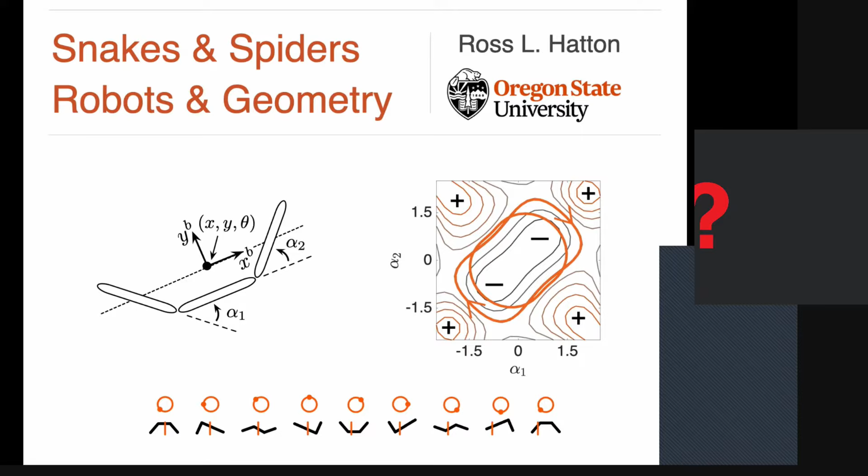My background: I came here, was an undergrad at MIT in mechanical engineering working on mechanism design and precision design. I spent my graduate years here, with a side detour to Japan for a summer on an NSF EAPSI program, after which I came back and took a faculty position at Oregon State University, hired as part of a push to build up a robotics program there.

When we got there, we basically got a big empty room and some space and were told, okay, build a robotics program. So we renovated this big empty space. We looked a lot at the history of the RI, pulled some inspiration from there, and put together a big multi-robot group with a large lab and adjoining student desks and faculty offices. In the time I've been there, we've grown from a few faculty members to 10 core faculty, plus a number from other departments, with centers in physical interactions and robust autonomy.

My background—while I was here I worked heavily in snake robots, so this slide won't be new for most people here, but looking at how we can make chains of actuators move through the world and across different environments. That was a lot of the work I did in Howie's group, centered around that problem.

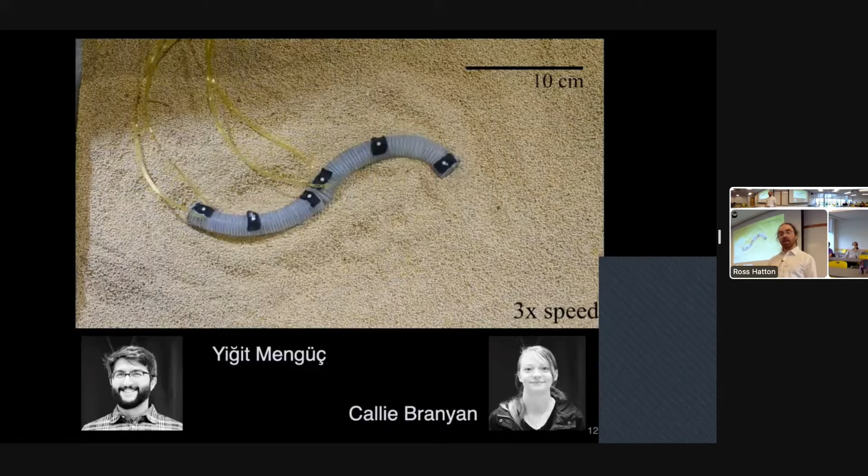This was a project with Yiğit Mengüç, who was a faculty member with us, also got his PhD here, and is now with Facebook working on Oculus haptics. And then Callie Branyan, who recently got her PhD, did some other snake-adjacent work.

I was on a paper with Michael Porter, an amazing bioinspiration researcher now at Clemson, looking at the structure of seahorse tails. He'd been doing a lot of work on the mechanics of why they're square, and we couldn't figure out why they tend to be tilted at an angle.

We spent some time looking at it and realized the reason the seahorse tail looks tilted at an angle is because you've stretched it out. The neutral position for the tail is actually that curled up position. So if you look at it in terms of the best even range of motion around the true neutral position, rather than the lab neutral position, you end up getting a tilted mechanism.

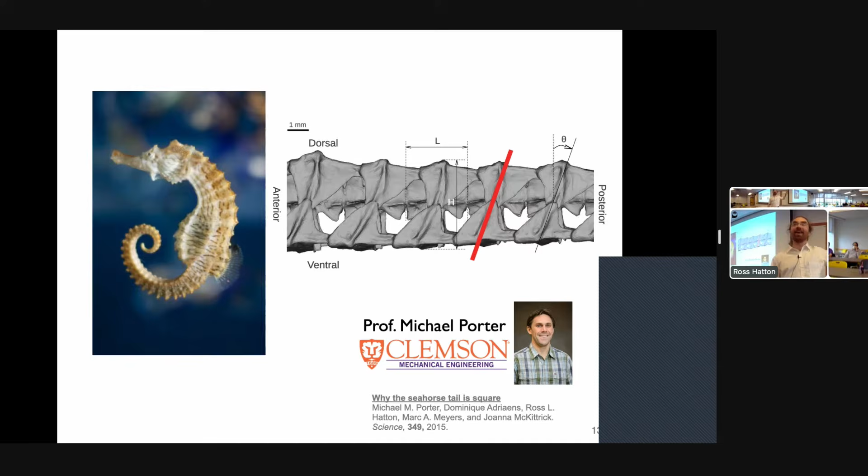Some of the snake robot work I've continued more recently is built off of sidewinders, and we're looking at, in this case, how to build a pneumatic sidewinder.

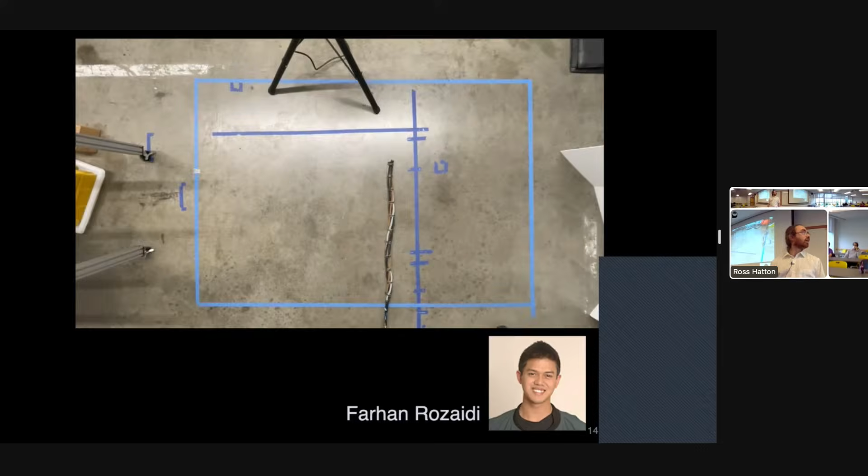That's a triple helix mechanism because the McKibben actuators have helical braids in them, and we arrange the McKibben actuators into a helical shape. The neutral shape of the robot has the McKibben actuators helical, which we enforce by having them pass obliquely through the separation discs.

This design is built off of some work Gina Olson, who's here now, did while she was at Oregon State, doing these bundled McKibben actuators.

My student Farhan and I figured out how to angle those actuators such that they form the microhelix, and when we contract one of those actuators, it forms a macrohelix that becomes the sidewinding shape. By phase shifting through which actuator we contract, we're able to shift the macrohelix along the body, which is the helical tread motion needed to get sidewinding.

I've also done some other work looking at how actuator placement matters, which fits into my theme of how actuator placement is important in understanding robot capabilities.

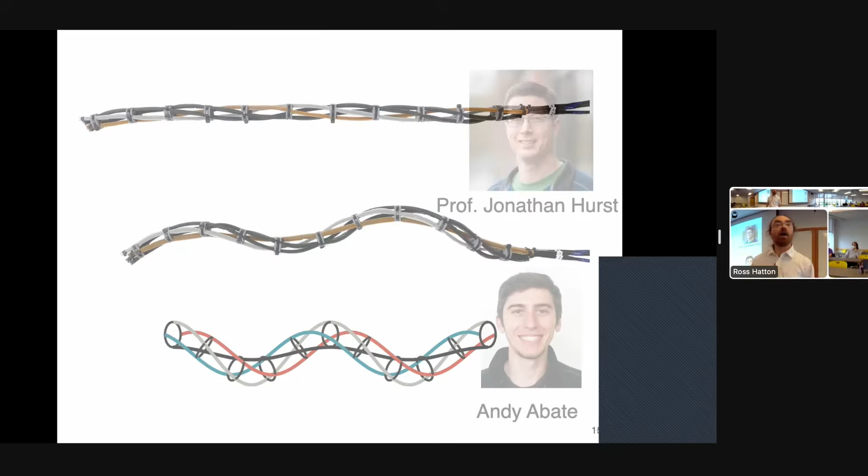Another example was some work with Jonathan Hurst, also an RI alum, and our co-advised student Andy Abate, looking at the walking robots that are Jonathan Hurst's specialty. They'd found when designing ATRIAS, the second generation of their lightweight agile walking robots, that they were concerned that if you have a hip-knee motor, you're passing all the forces for support through both actuators, so they felt that might be extra load on the knee.

They had the idea to make it a double hip with a passive knee linkage in order to avoid any serial pass-through in the motors, and have the motors in parallel to share the load. But when they set that up, they found it gave much worse energy efficiency than the previous serial design. When they went back to the serial design.

Like this for the third generation Cassie robot, they found much improved efficiency. So the question was, what's happening there, why does it happen? What we found, and were able to mathematicize in terms of power - we call it power quality - is that if you have those motors in parallel, when you're in stance just holding, they share the load nicely. But when you're swinging while in stance, one of the motors is backdriving the other.

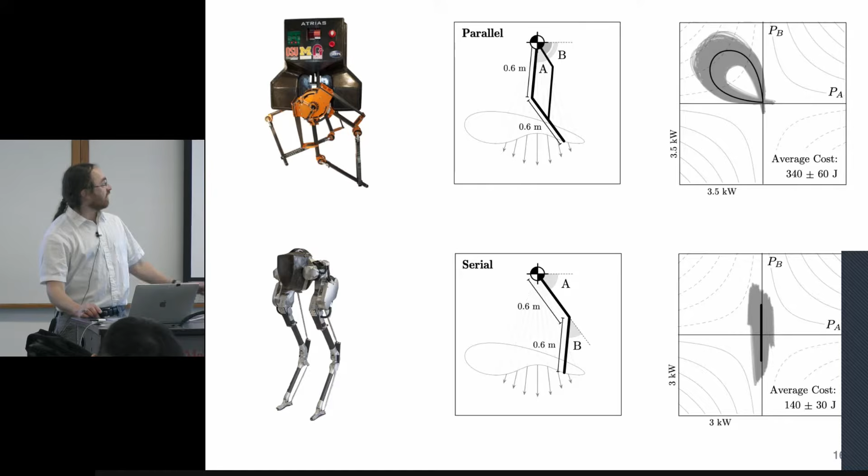From that we were able to show that if you look at the power in the motors, if one is positive and one is negative, that ends up being bad power quality. So you can evaluate for a mechanism, for a given gait motion, what is the...

...is that mechanism's actuator placement well tuned to the task? It turns out to be task-based, where you have bad power quality when you're in that positive-negative, second or fourth quadrant, but good power quality if you can stay out of it, or at least stay on the edge of it. So we were able to build up a strong theory about what makes a good mechanism-task pairing.

One of the things that comes out of it is that a lot of metrics for tasks come out to be something like a 2-norm, which is rotationally invariant - that doesn't change as you change mode shapes or your task, your power quality doesn't change. The power quality is a lot more like an L1 or L-infinity norm, in that as you change your grid - if you were to take a Manhattan grid and rotate it, the relative distance between points changes as you rotate the grid. A similar thing happens here for task tuning to actuator placement in a robot.

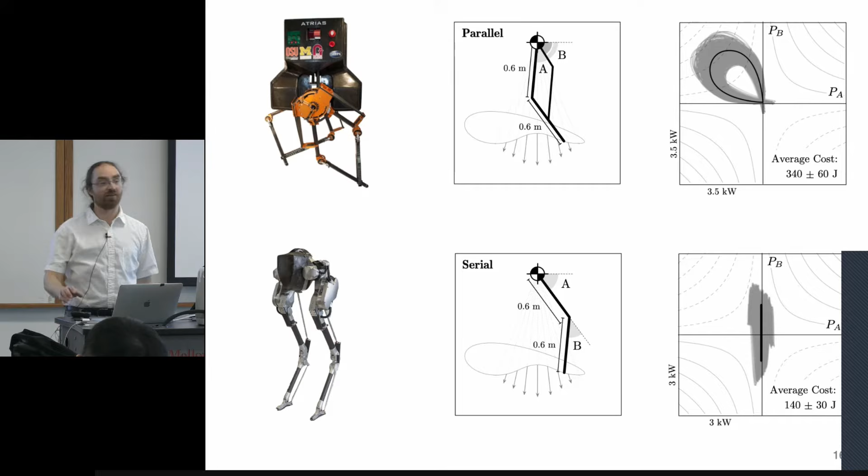Some other work I've done recently, as part of an overview, is I'm on an EFRI team - this is a big NSF 4-year grant where, across the two rounds they awarded it, there are about 20 teams working on novel soft robot concepts. Our concept is based on using buckling structures and actually taking advantage of buckling.

This is a robot that Nick Gravish, who's leading the team, his student, and one of my students and I have been working on, where we can build a hinged oar out of a tape measure and control the angle of the tip of the tape measure and the base length of that triangle. By pumping that angle and that base length, we can actually get swimming motion. The technique, to understand what's the best pumping motion, uses some of the geometric mechanics techniques I'll talk about later.

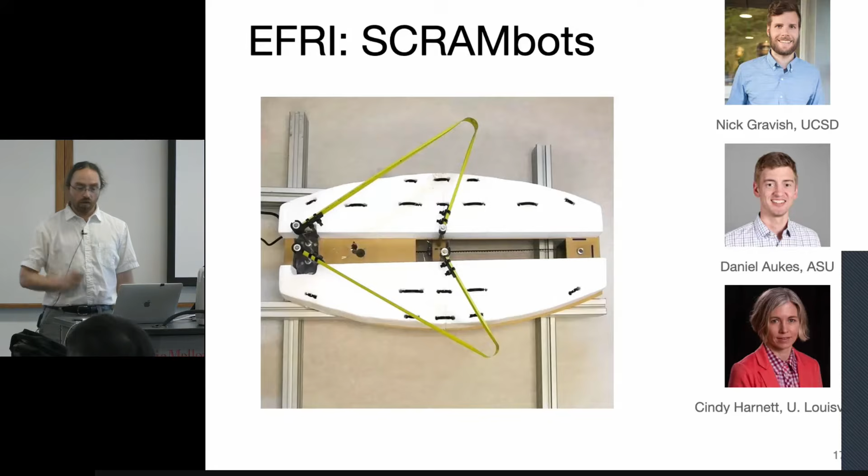More recently, in my time at Oregon State, I've also started a second sideline of work looking at spider-inspired problems. We've got a number of things revolving around sensing. At the end of my talk today, I'll talk about some of the spider-inspired sensing work we do and how that merges engineering and biology with some applications.

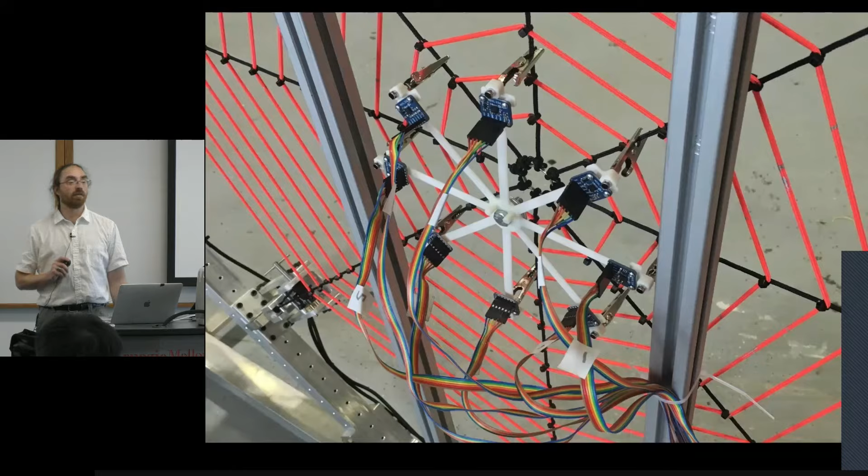As the last piece before I dive into some of the more technical ideas of the talk, I'd like to speak a little bit about some educational work I'm doing within the robotics program at Oregon State.

One of the features of our program is that we're bringing in people from many different disciplines. We've got people coming from the traditional core engineering disciplines - mechanical engineering, electrical engineering, computer science. We also have people coming in with backgrounds outside of that area, like psychology, and people with strong dance backgrounds for some of the human-robot interaction work we're doing.

When they're coming into the program, we need a way of bringing everyone up to speed, a good normalized robot boot camp, bringing in those baseline technical skills of working with a robot that make graduate students so much more effective at applying their work and understanding what happens below the robot algorithms, understanding that robot stack.

I've been working as part of our introductory class. It's the second class they get in the sequence. First class is high-level robot algorithm ideas. Second class is this full-stack robotics class, where we take a number of small robot kits. They don't have all the fancy features you get in a high-end robot, but they expose the students to all the other engineering problems that get solved by the time you buy a high-end commercial robot platform.

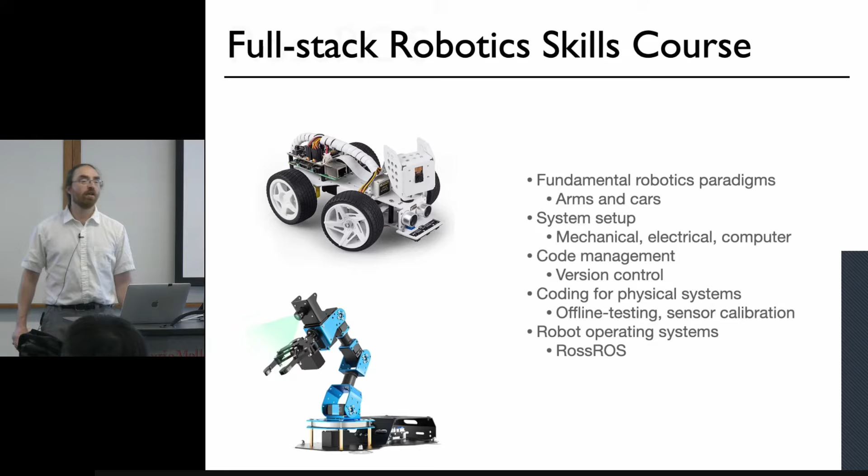But if you want to teach publish and subscribe, it's very unwieldy - there's a lot of overhead to learning it. That's why I put together for this course, available at rossross.org, a lightweight publish and subscribe framework for quick prototyping and educational purposes.

The core file is about a 300 line Python file, about half of which is just comments and documentation. So it's fairly small - it's a minimal interface to Python multitasking, giving safe threading for preemptive multitasking, or an alternative version using cooperative multitasking, so you can see just the bare bones minimum of how these concepts work.

We can talk about the promise and peril of using threading and show race conditions. There are good ways of showing this.

The core components of it are a message bus with some rewrite protection in the threaded version, and then a consumer-producer wrapper class that allows you to take any function - say read from motor, or take in sensor values and decide where the line is. You can write those functions individually, then wrap them in this consumer-producer class, which will run them on a timer, in their own threads if you're doing preemptive multitasking, and just get that bare minimum idea of how to do a publish and subscribe setup.

You can use that for educational purposes as an assignment. I give them the spec and in a week they put together the basic pieces, then the following week I provide the reference code and have them port it over into the reference version. That gives them a spiral learning piece of trying it themselves and then quickly seeing a reference implementation to learn from. The idea is these graduate students are trying to quickly wade through all the robot concepts so they know what to look for and what to learn down the line.

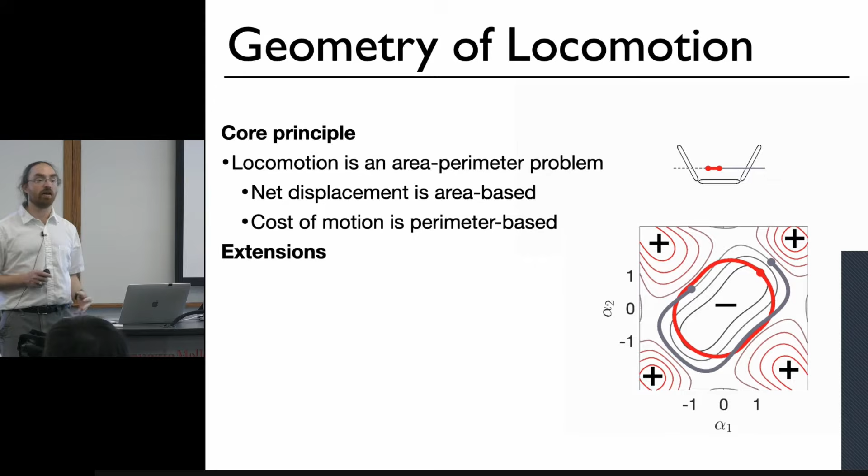We've got some extensions - that material was from when I was here, and I had that framework pretty much worked out. Since I've been at Oregon State, I've been working on various extensions. One extension we've looked at is systems with shape spaces of 3 or more dimensions, using that same principle I drew for the simple 2-joint system, for this 3-joint parallel linkages system, to find the optimized gait for how this shape could move.

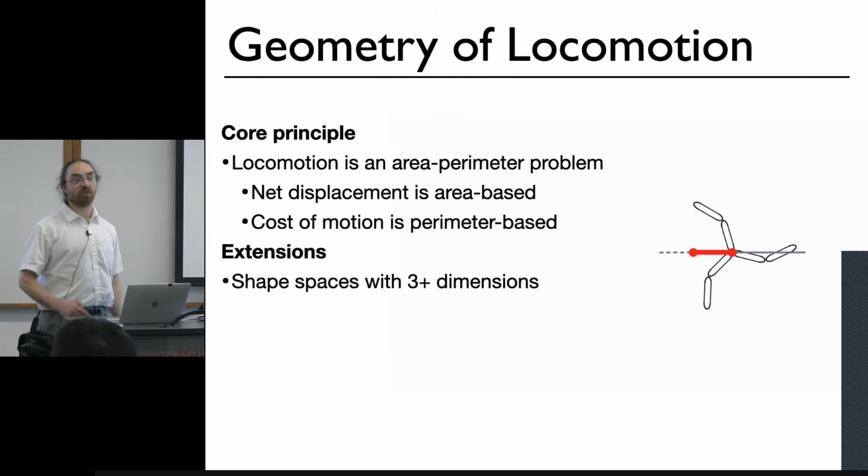We're also looking at data-driven geometric locomotion - the idea that rather than going through an analytical model to find those area functions, we can get the relevant information from online data recorded as the system moves, and use that to put together what eventually becomes a geometrically informed reinforcement learning algorithm.

Moving forward from there, those are the big ideas of this area-based paradigm. To show some examples of how we make that work, we start with a constraint-based locomotion model.

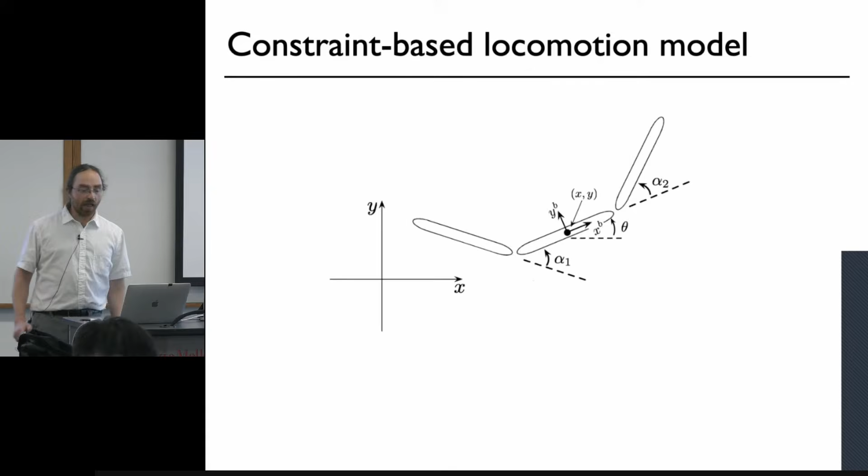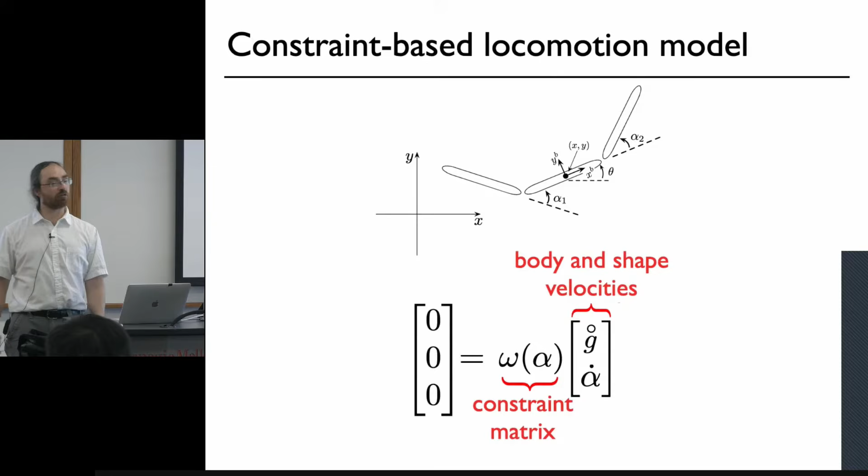To explore that, we take our simple 3-link system. This is a minimal locomoting model where I have a position and orientation for the middle link, and a shape defined by the two joint angles. For many physics models, we can represent the locomotion physics as a constraint, where a constraint matrix relates allowable combinations of the body and shape velocities. The body velocity is the forward, lateral, and rotational velocity, and the shape velocity is the rate at which the joint angles are moving.

For many different physics, the allowable combinations of those velocities that respect the physics constraints are in the null space of this constraint matrix.

As an example, let's look at skaters. A skater system has wheels or skates that prevent those wheel sets from moving laterally. They're completely prohibited from moving laterally, but are allowed to translate longitudinally and rotate freely around their respective centers. So we can write down the Jacobians from the body velocity and shape velocity to the body velocities of each of those wheels.

Then we can say that the y component, the lateral component of those velocities, has to be 0. So I can extract out the y component of those Jacobians, take those 3 rows as their own constraint matrix, and say that any allowable combination of body and shape velocities under these physics has to be in the null space of that set of lateral components of the Jacobian.

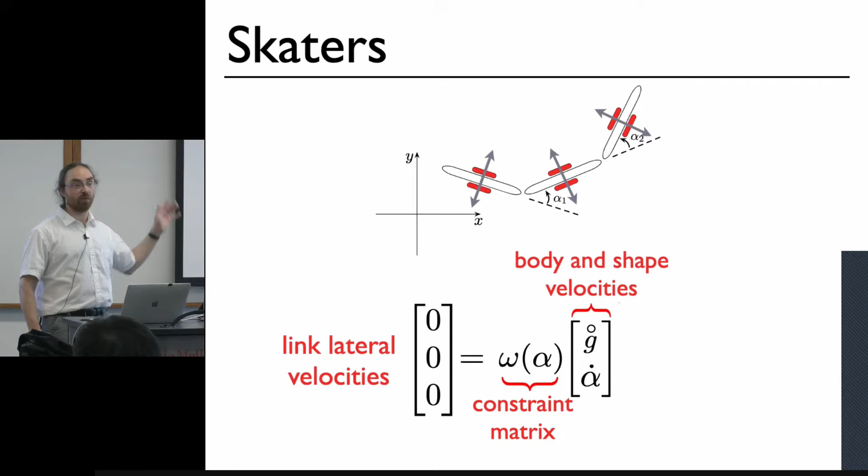For free fall and inertial systems, if I'm like on an air hockey table floating in space or in an inertia-dominated fluid where I don't need to worry about viscosity, then the momentum or momentum-like term for the system, if I start at rest, has to stay 0 for all time. So I can write down that momentum function for the body and shape velocity, and say what's the overall linear and angular momentum of the system.

If there's a fluid around it, I can do added mass for the fluid and map that all through, and say that the only allowable combinations I can have of those variables, if I start at rest, is to stay at inertial rest, keeping 0 net momentum.

Finally, if I'm looking at systems in viscous fluid, I can look at the overall drag that acts on the body. In a viscous fluid, the net reaction drag is going to balance out — your inertia is small compared to your viscous forces. You very quickly go to quasi-static equilibrium, and any force I apply over here is countered by a force over here.

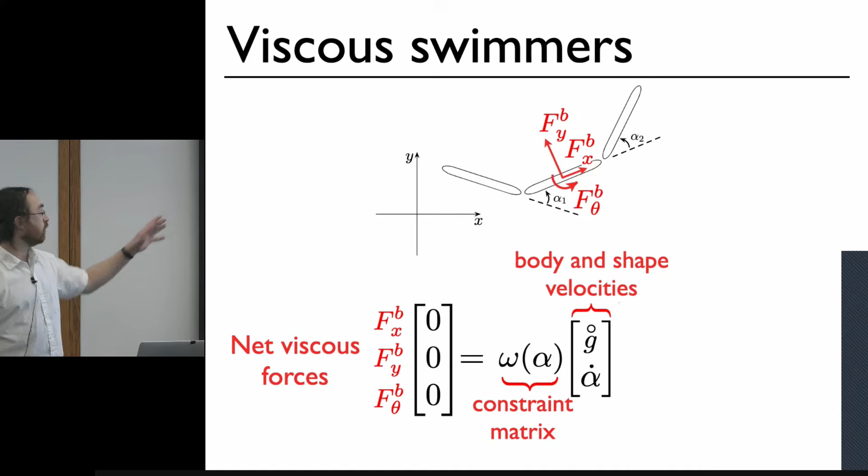If I have more drag force for moving sideways than longitudinally, I can push off and go forward, anchor and pull, and still be able to move even though at any time my total drag force on the body is 0. So I can use that drag force mapping as my constraint.

Once we have a constraint model for locomotion, that tells us we can test any combination of body and shape velocities and say, does this respect the constraint or not? But that's not really what we want for locomotion analysis. Instead, we want to specify the shape velocity and say, given that shape velocity, what is the null space complement of that in those constraints — that is, what body velocity is compatible with the physics and that shape velocity.

To do that, there's a technique for constraint solving that I like as a general technique, and I haven't seen it taught everywhere, so I like to go over it. You separate your constraints into the portion that acts on the known and unknown portions of your velocity when solving for a null space complement. Then, because the other side is 0, you can pull over all of the unknowns to one side and the known pieces to the other side.

Then you can invert that constraint on the unknown components, multiply it into the constraint on the known components, multiply those matrices together, and you end up with this matrix called the local connection, which acts like a Jacobian from your shape velocity to your body velocity.

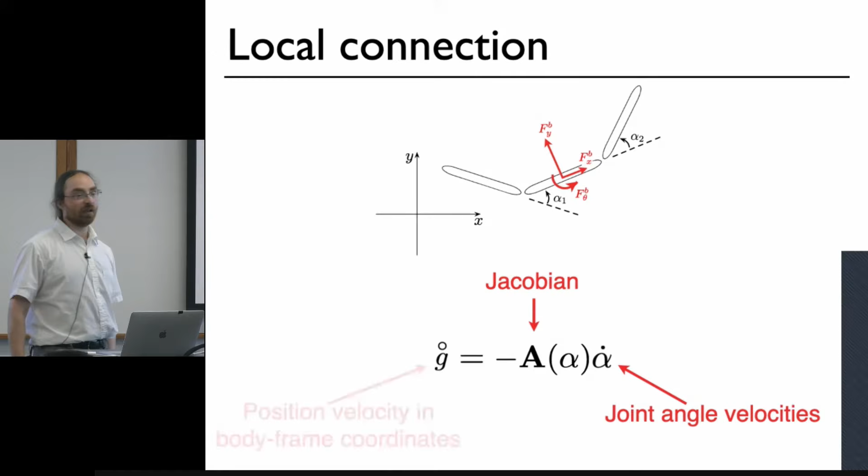So this acts conceptually like your manipulator Jacobian, in that you take your joint angle velocities and it tells you how the end effector is moving. But in this case, the end effector is the body itself.

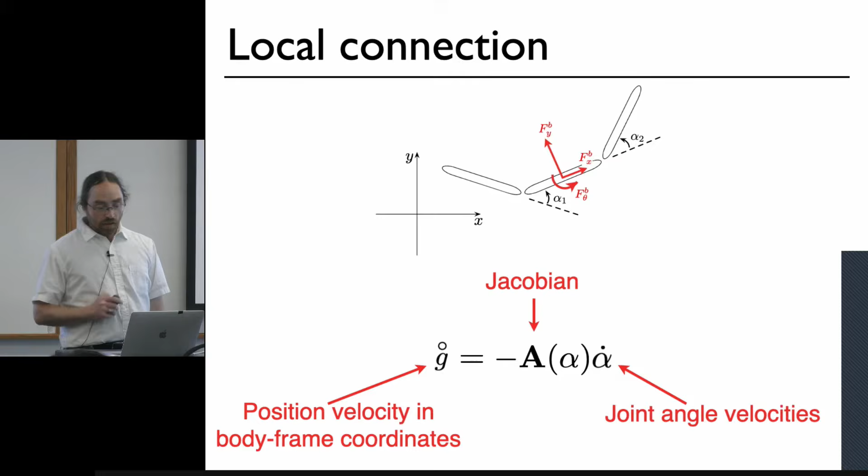To geometrically understand what that means, we can think of the matrix as a stack of row vectors, each of which interacts with the shape velocity via a dot product operation to produce one component of the body velocity. We can split that out and say each of those vectors is a function of the joint angles, becoming a vector field over that space — really a covector field if we're being formal about the differential geometry.

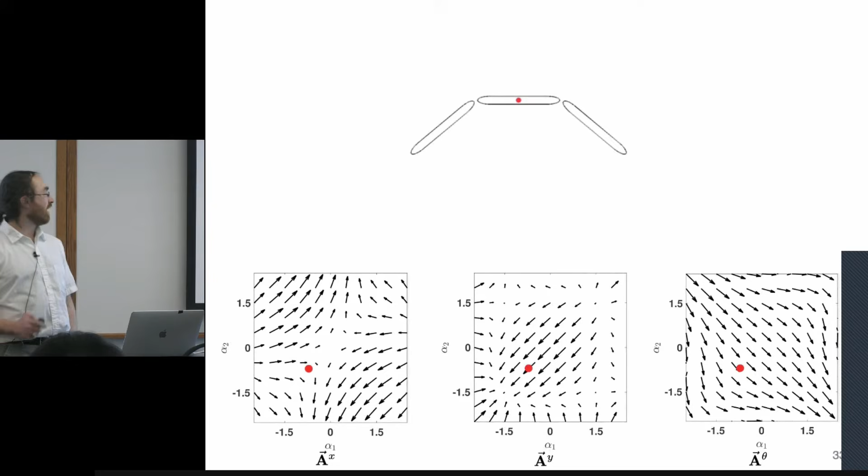Then we can go through and say that as we execute a gait, the system is going to move forward, laterally, or rotationally whenever its path through the shape space is in the direction of the corresponding field.

It's going to have no motion whenever its path is across the field, or it's going to go backwards in that direction when it's going against the field. At that point, we can start to think about how we could place cycles in order to get more flow along the field than against the field, or to flow along a field as much as against it if we don't want any net motion in a direction.

But if we start trying to reason at that level, it very quickly becomes subjective and intuitive, and doesn't really give us anything we can work with programmatically. So instead, to understand those ideas of flow more along the field and against the field, we can turn to two principles about these fields that explain how that works. The first of these is non-conservativity.

The minimal example for non-conservativity is a wheel that can change size. If I take that wheel and roll it clockwise by a half turn, it moves forward. Then if I shrink it to half diameter, it doesn't move, but when I roll it counterclockwise by half a turn, it moves back less than it had moved forward previously. Then I return it to its original size, and it's now in the original orientation, but has moved forward compared to its original configuration.

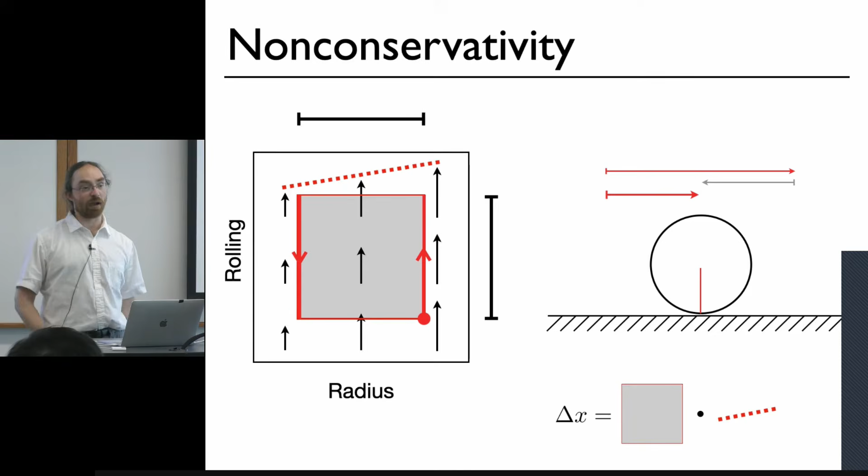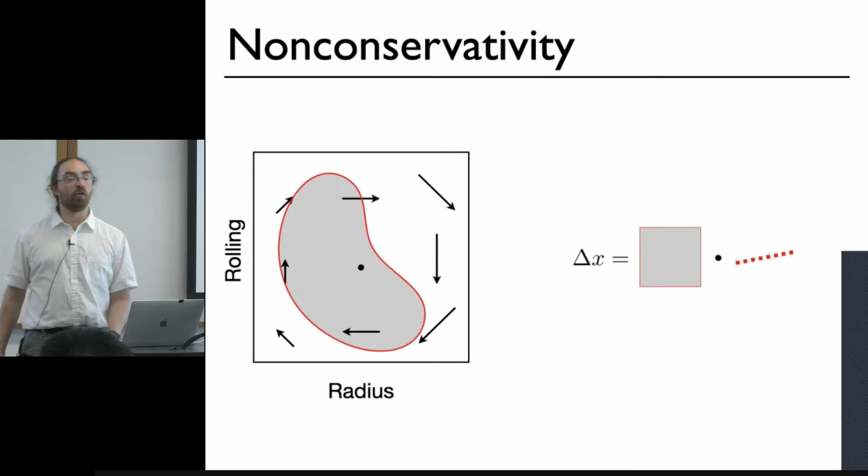If we take that principle and extend it with some more calculus to look at more complicated fields, and maybe with gait cycles that aren't just boxes, we come back to Green's theorem, which is an aspect of Stokes' theorem. It says that the derivative we looked at, how steeply it changed crosswise, is measured by the curl of the vector field, which accounts for crosswise differences in two different directions, and whether they amplify or cancel each other out. That derivative we looked at was a special case of the curl for a vector field that points in one direction and changes in one direction.

The area multiplication then becomes an area integral. We're looking at that curl individually at different pieces to integrate back up the changes in the field from one side of the gait to the other side of the gait. This is our first principle for what we look for in the field: we look at the curl of that field.

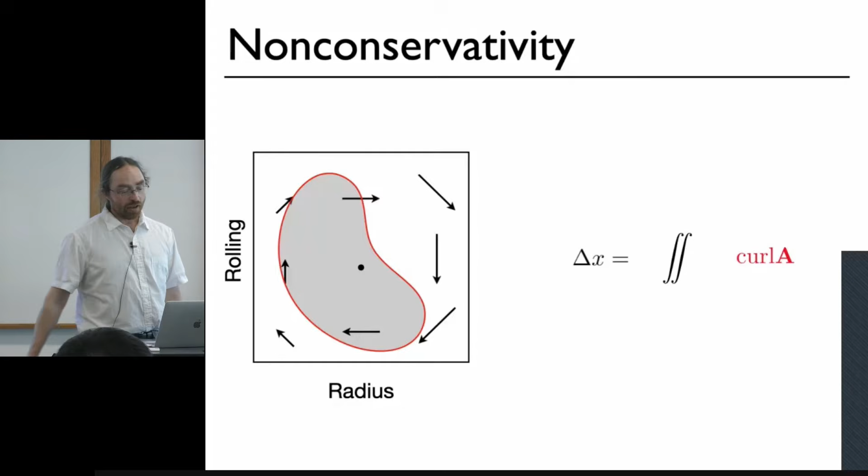The second piece we look at is non-commutativity, which we can see from looking at a differential drive car. If we drive forward, turn, drive backward, and turn the other way, up to a small angle approximation, we've achieved a net lateral motion, even though the car never moved laterally on its own. It was only the combination of the turning and forward-backward motion that gave us a net lateral motion.

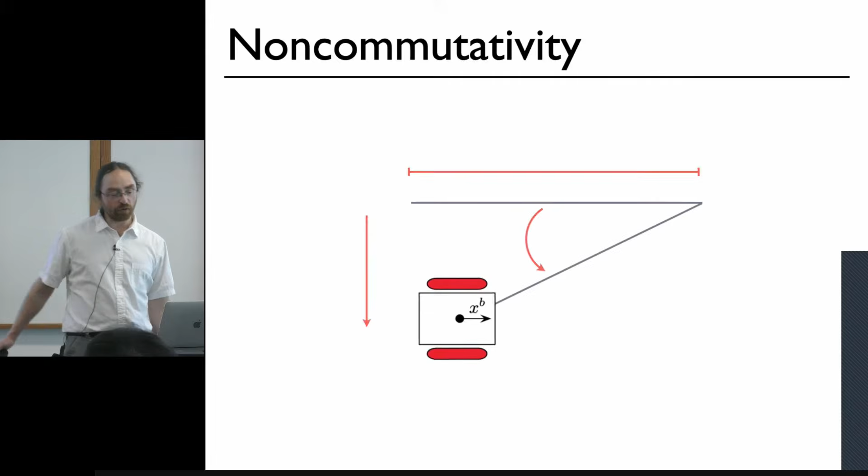That net lateral motion is proportional, in the small angle limit, to the size of that forward-backward motion multiplied by the size of that angle that we turned through.

If we look at that from the vector field approach, what we're saying is that the forward motion was moving the wheels together. So the two shape variables are wheel 1, wheel 2. If we move the wheels together, we end up moving forward.

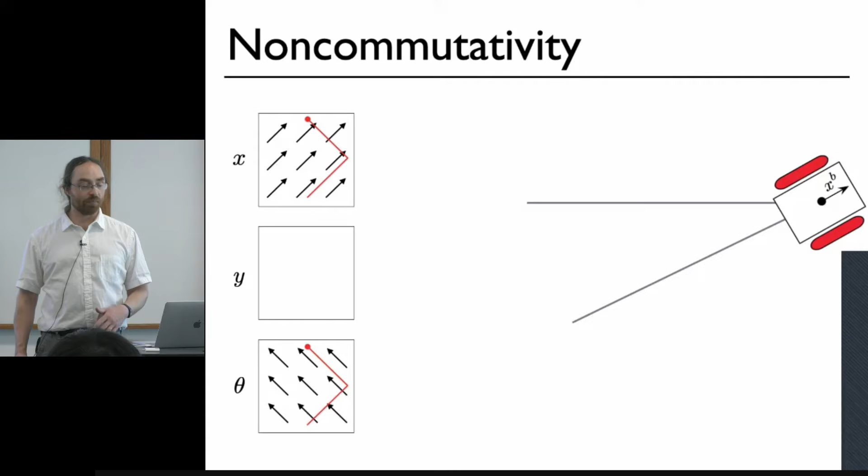The turning was rotating to move the wheels against each other, so along the theta field, back along the forward field, back along the theta field. The amount that we moved forward by corresponded to the span of the gait in that wheels-together direction. The amount we turned by corresponded to the span of the gait in the wheels-against-each-other direction. So once again we get an area-like term.

But now that area term, instead of being a curl term, is the Lie bracket term, which you can think of as an operator that measures how much the rotation of the body frame changed the direction in which the car's forward direction was pointing in the world.

So as we rotate by theta, that turns the body forward x to start pointing in the northeast direction instead of the pure east direction. That Lie bracket operator is a way of measuring that coupling between rotation and change in forward direction.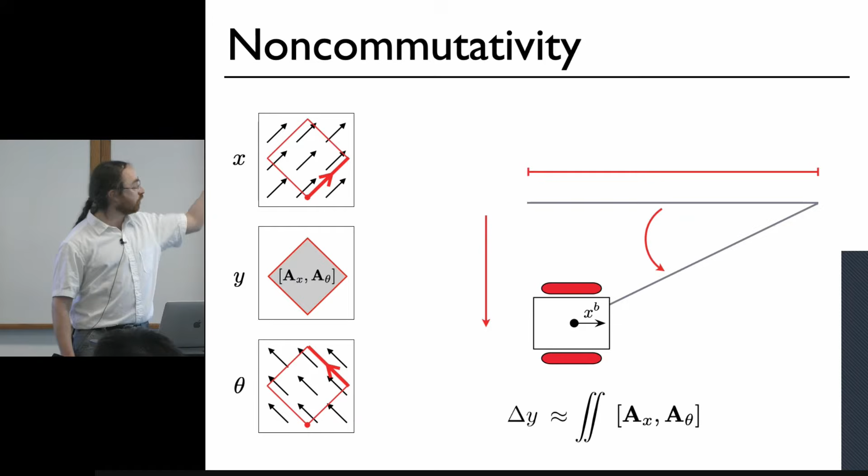Pulling these ideas together, we get what's called the curvature displacement formula, which says that the net displacement - I've got footnotes here for people who want to play the deeper math game, I won't read them out - is equal to an area integral of the curl, or formally the exterior derivative, which gives us that forward minus backward motion.

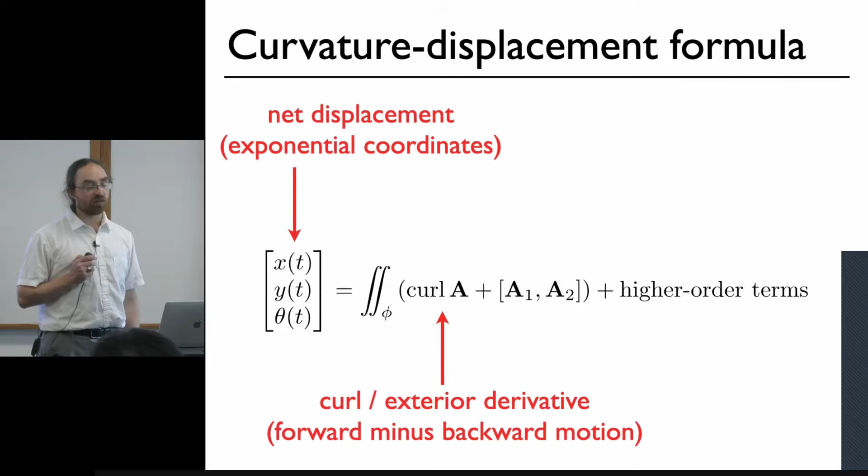So as if I'm swimming around, sometimes I'm reaching further, I've got more leverage on the world, I've got a bigger wheel, and then as I tuck back in, I've got a smaller wheel.

This local Lie bracket, this parallel parking term, says that I might nudge my body one way or the other as I move my limbs, so we need to account for some parallel parking effects. And then some higher order terms correspond to the things we threw out when we looked at the small angle approximation with the parallel parking.

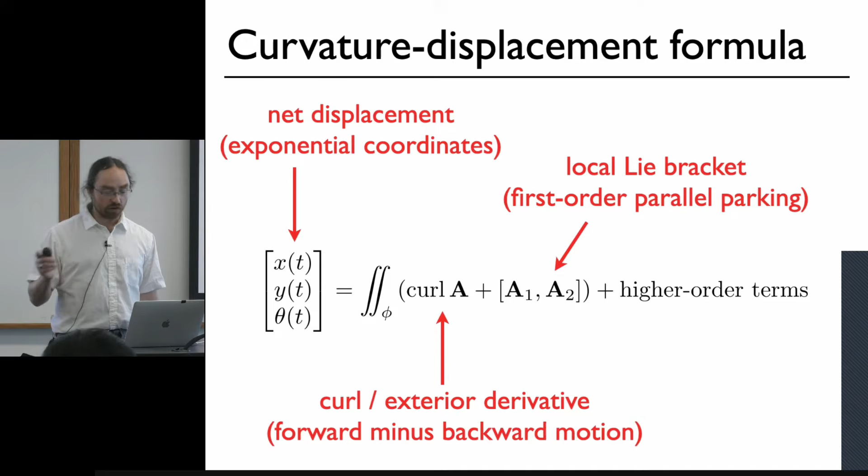My thesis work focused on how, by making a principled choice of coordinates, which I'll touch on briefly, we can often get rid of those higher order terms, at which point we get this dA operator. It's the curvature of the constraints, talking about how changes in one constraint, moving in one shape direction, changes the constraints on the system, in a way that we can exploit to get that cyclic motion.

We can make this an operator on those connection vector fields. This gives us the idea that we can take these vector fields we computed for the swimmer and turn them into this curl plus Lie bracket term as functions over the shape space. And we can execute a gait cycle.

We can see that this gait cycle encompasses a sign-definite negative region in a clockwise, right-hand rule negative direction loop, and so is going to move the system forward, but has net zero encirclement in the y and theta field directions, so it's not moving the system anywhere laterally or rotationally.

Once we had this principle, we can also go through and start looking at things like how displacement changes as we scale up a gait - what happens if you start making a bigger or smaller motion. So for example, if we have a set of circular gaits that increase in radius, those are in a roughly constant region of the dA field.

increasing quadratically in area, so we have a somewhat quadratic-like growth in the net displacement per cycle. You get superlinear growth in your net displacement per cycle as you increase that gait radius, because you're better taking advantage of the nonlinearities, the higher order terms in the system dynamics.

As we go to bigger circles, however, we start encompassing some of the opposite sign region of the space. What that does then is that means we see diminishing returns, then actually a loss of performance in the gait as we go bigger and bigger, because we're now doing motions that actually go beyond what's useful and actually start pushing us backward the other direction.

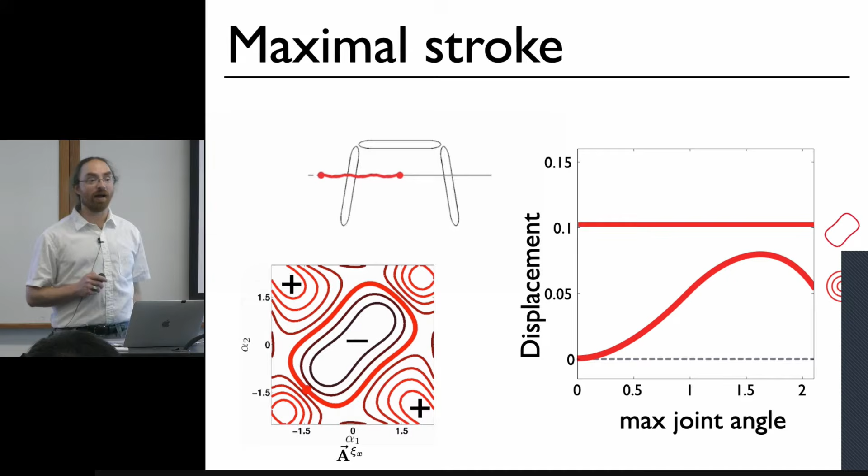As you may have noticed when I switched back from the excursion into non-commutativity, non-conservativity, into showing how we actually use it, I switched from using the middle link of the system to using this floating reference frame with an average orientation and center-of-mass-like term. That comes into a change of our body frame definition, where we were able to get rid of the higher order terms in that constraint curvature equation by shifting from that middle link to weighted center of mass and weighted mean orientation of the links.

The basic principle is that when you look at the motion of that average frame, you can see it's basically moving monotonically forward from the initial configuration to the end configuration of the gait without rotating very much. Whereas if I tracked the center link on the same trajectory, I would have seen something much more loopy.

The principle is that as you move forward at an angle, you pick up error that shows up in that series expansion. The higher order term errors correspond to large forward motions at an angle. So if we can choose a body frame that never has a large excursion in angle, then forward motion always counts as forward motion. That parallel parking term gets small, and the higher order terms get really, really small.

So we can actually do a principled optimization to find those best coordinates. The basic form is: if we take the original middle link frame expression for the theta field — how the system is going to rotate as we change shape — we can perform a decomposition on that field to get a curl-free component and a divergence-free component. This is called a Hodge-Helmholtz decomposition.

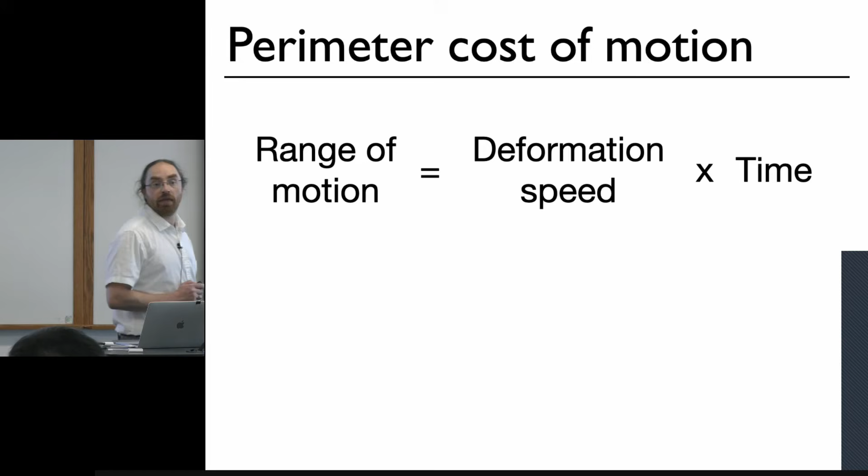As a basic rule, the deformation speed corresponds to the instantaneous effort that you're putting in. So the faster you're changing your joint angles, the more effort you need to put in, barring other effects we can take into account.

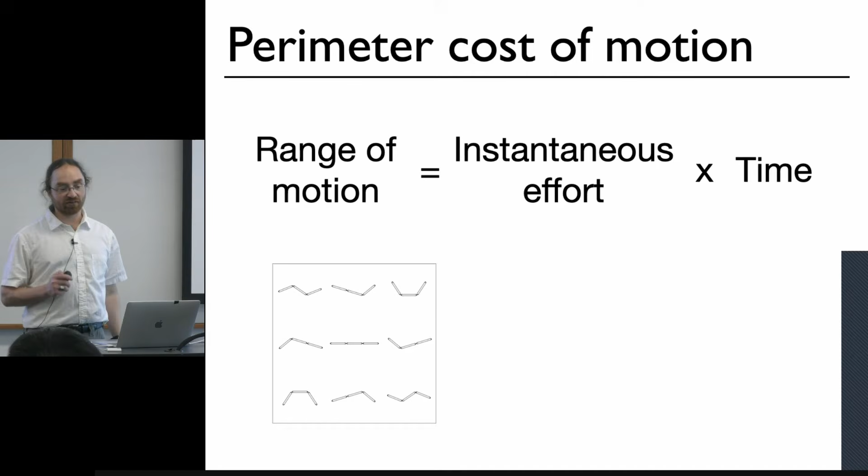The first order effect is that instantaneous effort correlates with time, such that if we take a system with our shape space dynamics and we fix the instantaneous effort as a fair comparison across gaits—I want to say I've got this much effort that I can use to move, and we're going to fix that across any gait that we put in.

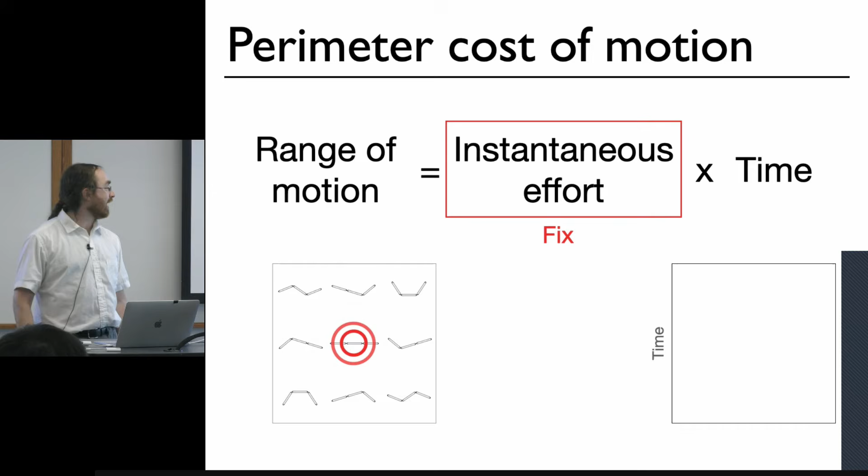If we look at the time taken to execute a set of gaits with increasingly large range of motion, that time taken is going to correlate to the perimeter of that gait.

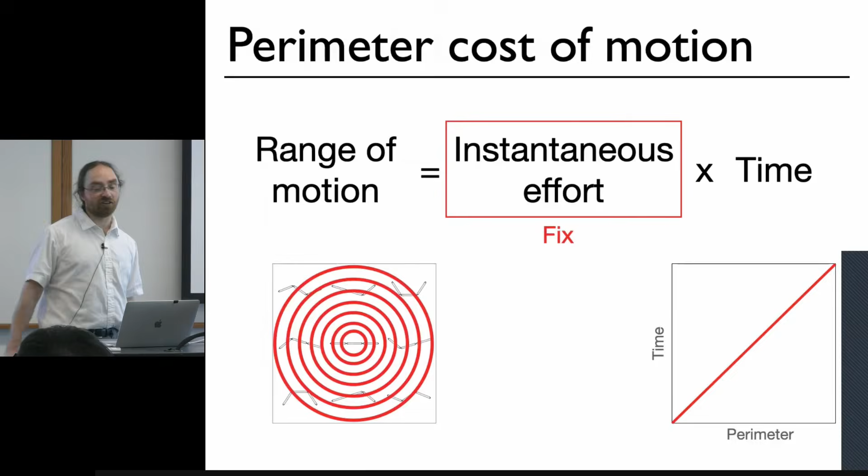So there are nuances there. For instance, we can put weighting on the shape distances. If we look at a system that is moving in the CU shape, so it's moving evenly, that's going to take a lot more effort than moving in this SZ shape.

The top one ends up dragging—if you're in fluid, you end up dragging sideways through the fluid a lot more than when you're doing the Z-shape motion.

So you can put in a cost weighting term that says the distance along the even axis is longer than the distance along the odd axis, and we can use that when we're talking about what we mean by perimeter—this extra distance weighting.

And then there are other effects, like motion when you're in a fairly curled up space tends to be easier than motion when you're closer to straight, just because of the leverage you've got on the body and the way pieces get moved.

That ends up meaning the overall shape we're looking at for the configuration space is not just stretched, but is actually also curved. So any path length perimeter effects you're looking for on the space, you should take into account that curvature when looking at what the cost is.

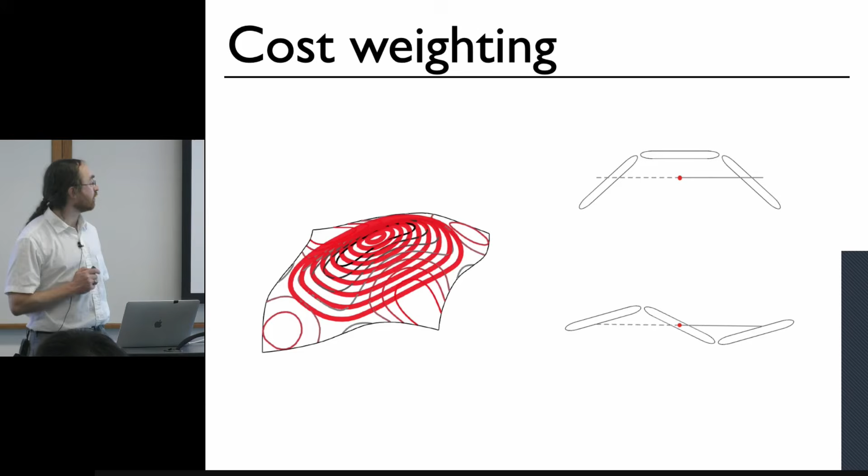That means, for instance, if you look at the set of gaits that have increasing radius, the time per radius line in the shape coordinates is not going to go linear, but is actually going to end up sublinear, because when you're in a dome, your perimeter length grows more slowly as you move away from the center. We can take these into account, but this still gives us the principle that the cost of motion is perimeter based.

Moving forward, this now gives us tools to go back to the idea that locomotion is an area perimeter problem, where we're looking at a way of balancing how long it takes to complete the gait cycle versus how far we go in the gait cycle.

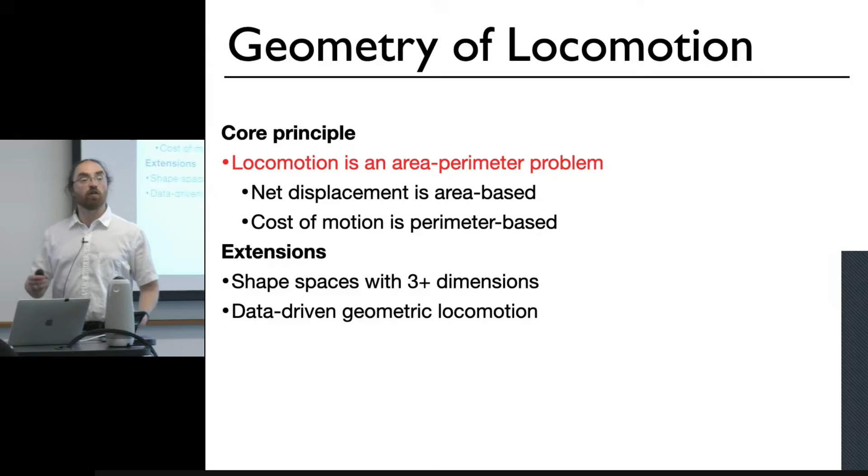We don't want to take a very long lunge, because that long lunge is going to take a very long time to make that cycle step, and there's diminishing returns at some point after my easy stride. When I'm walking, there are of course extra effects, but it's the same principle—I want to balance time taken against distance traveled.

This turns out to be a really nice fundamental geometric principle, because we start off with the idea that net displacement is an area integral, and that means the gradient of the net displacement is the gradient of that area integral.

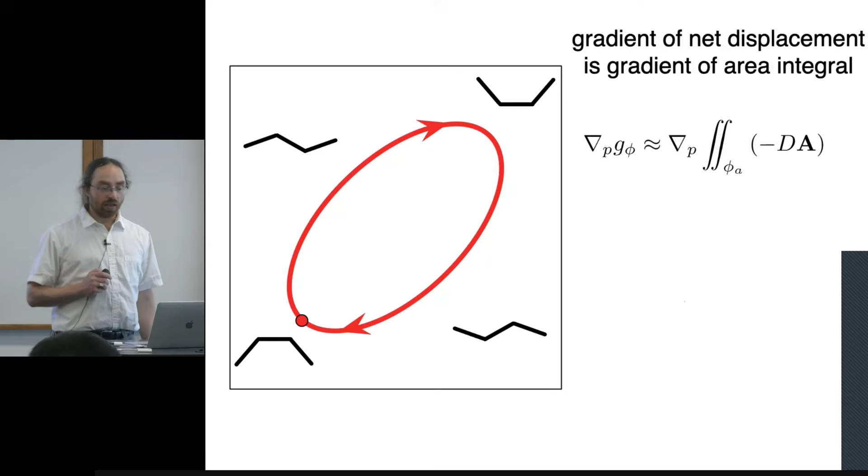We can bring in the idea of the Leibniz rule, that when we take the gradient of the integral, it's the gradient of the boundary times the integrand, which gives us the idea that we can insert the gradient into that integral process. There's a bunch of fairly hairy math here, and I'll come through to where it resolves into a cleaner expression.

For this 2D case, it ends up saying that we can take any variation we might make in the gait, any change in that path, and say how that changing the gait input parameter moves each point of the gait outward. Multiply that by the value of the constraint curvature at that point, and that tells us in parameter space what the benefit gradient of changing that gate parameter looks like.

Overall, that turns into basically an outward pressure from the constraint curvature. So the constraint curvature is saying, okay, you want to expand your gait cycle to go as far as possible, to keep expanding outward to go further per cycle.

When we take the efficiency as the ratio of net displacement to perimeter length, we can say that the gradient of that ratio is proportional to the gradient of the displacement minus a weighted gradient of the perimeter length. That acts as a surface tension from the distance metric, saying that long gaits are expensive—like a soap bubble, balancing the pressure to inflate with the surface tension to make it smaller.

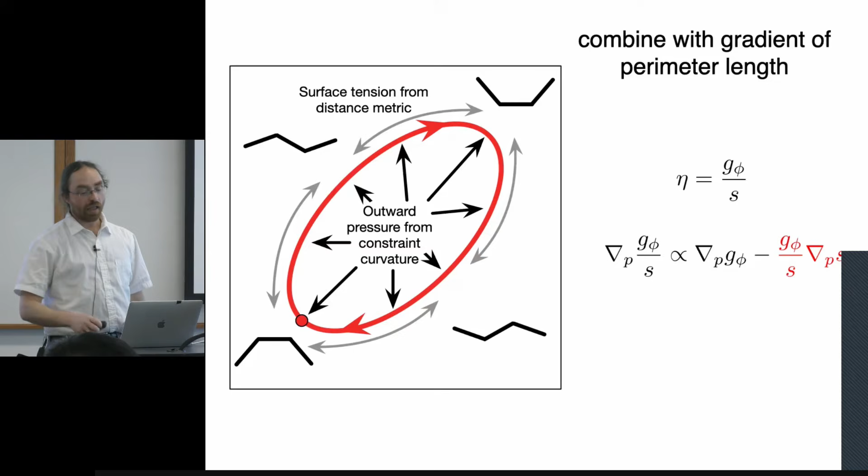If we put that directly into an optimizer, starting from that zero contour, we can shrink down and solve until we hit the equilibrium between that surface tension and that pressure. That gives us this gait I showed earlier, which takes only 3/4 of the time to complete as the zero contour gait, but gets 85% of that net displacement, because it's only giving up the very low yield regions. It's expanded until further expansion becomes not worth it.

For variational calculus, it sounds really scary, but once you actually start doing the details it works really nicely for any parameters you put in. You can change between one set of parameters and another with just a Jacobian matrix that you stack onto one end of the derivative.

So at this point, we've covered locomotion as an area perimeter problem. A couple of questions I often get: how does this work with 3 or more dimensions? I've used perimeter and area—what does that mean for higher dimensions? The basic idea is that when we look at the perimeter area problem, we're really looking at a 2D version of a 3D problem that has flux coming into and out of the surface. That scalar value plotted in the top plot is really a measure of magnitude and sign for this out-of-plane flux property.

When we do the area integral, we're actually looking at how much flux from this field is going through the loop. When we go to three dimensions of the shape space, the flux field becomes a 3-dimensional flux field. You can think of this expand-and-contract to maximize area perimeter pieces as expand, contract, and rotate to orient, rotate and curve to orient—almost like a sail problem. You've got this vortex-filled wind map, and you're trying to build a wire loop that's as short as possible but catches as much flux going through it as possible.

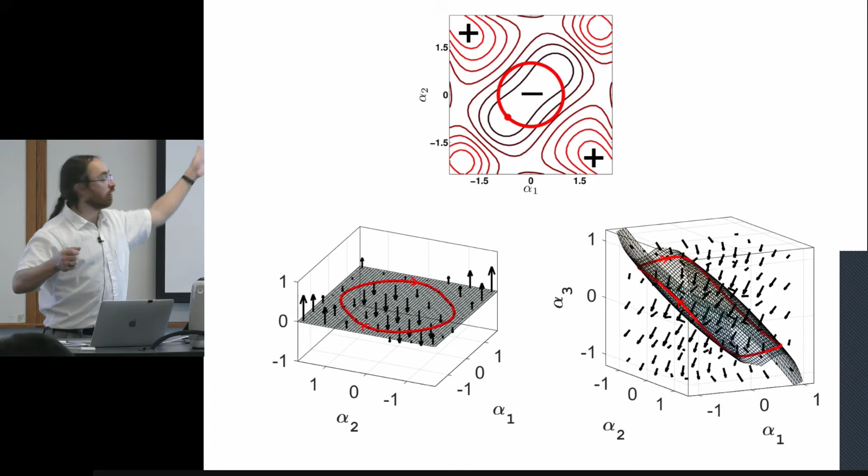All of these growth rules for how you grow the field work out really nicely into a grow-and-bend. In 3 dimensions, you stop using the word curl, but the math in differential geometry takes us up to arbitrarily high dimensions using terms like exterior derivative. You always get: here's a loop, and the constraint curvature tells you how you could deform the loop to increase the flux going through it.

So you can, once again, go through and vary your gait parameters until you hit an equilibrium point where it's no longer worth it to expand or twist your gait loop any further.

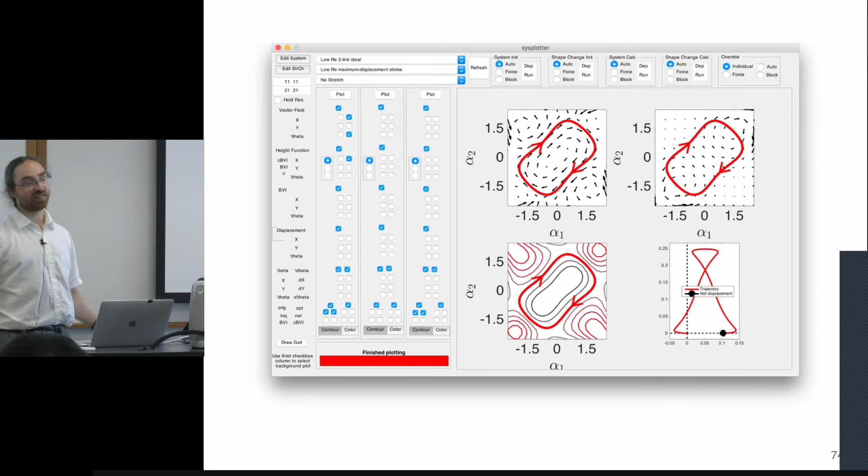We have all of this material built up into a MATLAB package on GitHub that you can grab. It's got a bunch of stock systems already built in, so you can play around with them. It's got a kinematics toolbox for gluing together your own higher dimension systems and building all these plots and animations, and also running the optimizer.

And so that's the 3 dimensions.

The final technical piece I'd like to talk about now is data-driven geometric locomotion. The idea here is, what if the system does not have a nice analytical model? The examples I showed at the beginning, we can write down the physics. The first principles physics treatment gives us this really nice structure for doing this analysis. But the same principle also holds in general for any kind of action-reaction motion, that your first-order model of an action-reaction motion is going to have this structure. So we can use those ideas in order to build out our intuition for how the system should move.

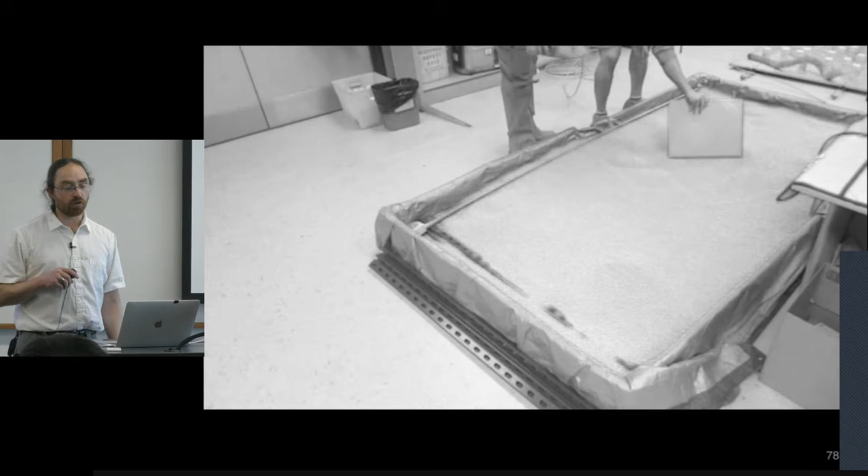One way to do that is to go through - and this is work done here at Carnegie Mellon - go through and twitch the robot in its environment. This is one of Howie's snake robots in the bead pit, and we're twitching it, looking to see how the system moves as we twitch it in different shape modes.

But that's fairly prone to error. There's a lot of transients as you're starting it, moving it. It's time consuming, so it's not what we'd like to be able to do. Instead, we'd like to be able to take this video here, look at that motion, and back out the principles of locomotion for this system in this environment directly off of the observed motion as it moves through longer range trajectories, without the start-stop transients.

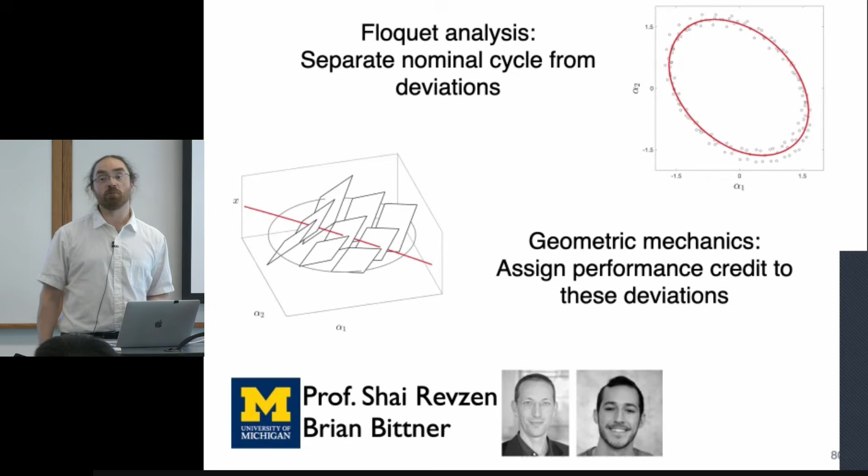This is work that Shai Revzen at Michigan and his student Brian Bittner and I put together for building what's essentially a geometrically informed reinforcement learning approach to understanding this kind of locomotion.

The basic principle here is I've got a 3-link system here, and we're going to give it a gait cycle, but between running the gait cycle and the actual shape it moves through, we're going to add some noise to it. We're going to put it in the viscous environment, but then I'm going to throw away anything I know about what the environment is on the simulation end. None of my analysis is going to use anything I know about the input cycle or the environment. We're going to have it execute this noisy cycle gait.

And then as it executes that noisy cycle gait, we're going to record its shape trajectory over here on the left and its position trajectory. And then we're going to go through and say, well first, what gait did it actually execute? Because we've thrown away any knowledge about that.

So the basic principle here is we're going to start by unpeeling the trajectory cycle from the shape space. We're going to look at those individually in the coordinates we choose to measure it in, 2 joint angles. Then we're going to use some of Shai's math to fold that back to a single multi-valued cycle rather than one long wave. And then we're going to do a Fourier fit in that space, which is more stable than trying to fit to the whole long wave. It better matches the moments that different points have on the fit. And then we're going to put that cycle back into the shape space.

So now that gives us a nominal cycle, the nominal gait cycle the system was moving with. We can then take any point along that cycle, zoom in, and look at all of the data points from all of the different cycles that were geometrically close to that point in the cycle. This is one of the key features here - we're geometrically associating data from different time cycle points at different times in the extended cycle. And each of those data points has a shape velocity and a position velocity associated with it.

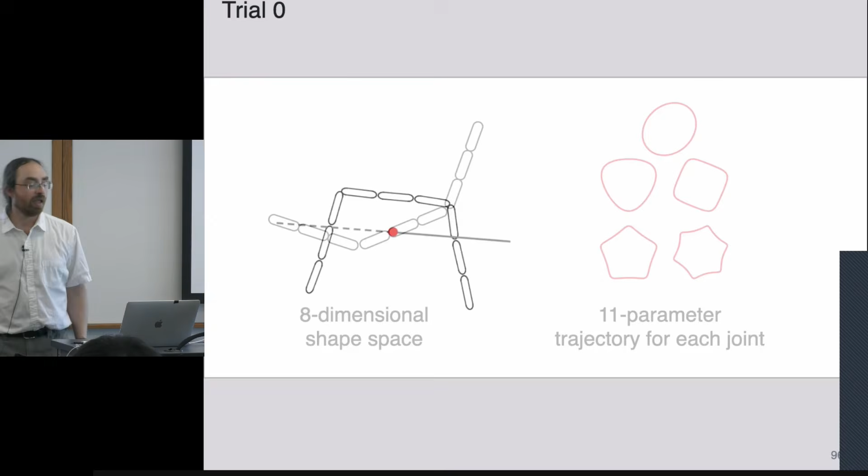So how does this scale? We did this with an 8-dimensional shape space. We took the 3-link system, divided each link into 3 links, and gave 11 parameter trajectories for each joint. We first tried moving like a 3-link system, allowing noise on those new joints, but only actively moving the original joints. And so we moved it along.

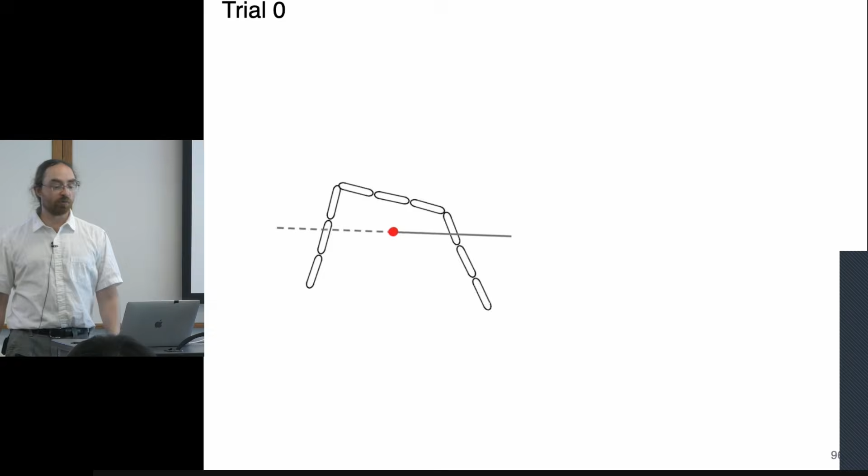We gave that a mechanical cost of transport of 1. Lower cost of transport is better. This is our baseline performance.

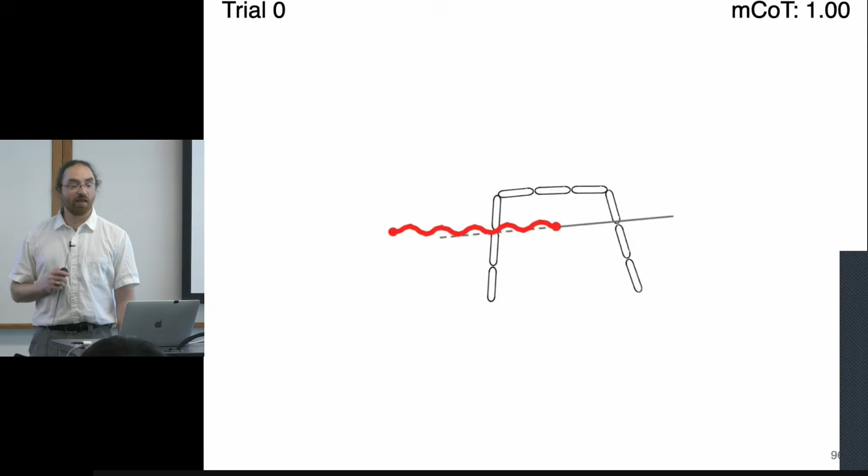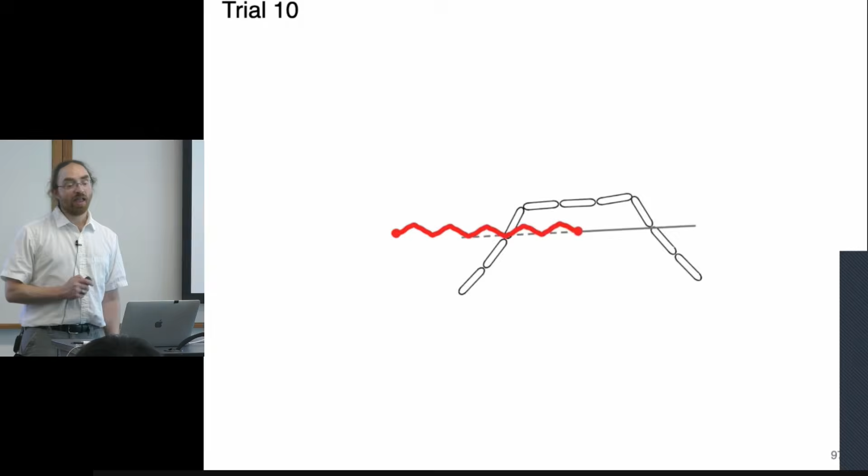With 30 cycles per trial, after 10 trials, so only 300 cycles, the system had already learned to put a little bit of curvature into the outer limbs, getting a better than 10% reduction in cost of transport. After 20 trials it was very actively curving its segments. After 30 trials, less than 1,000 cycles, it had pretty much learned how to move in that snake-like fashion, with a 30% reduction in the original cost of transport.

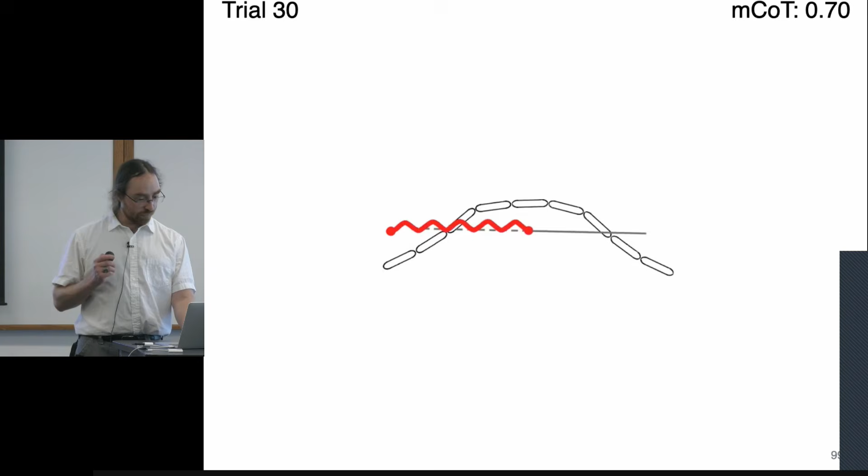OK, so we got that 30% reduction in the cost of transport. And so I was just going to wrap up with going from snakes to spiders.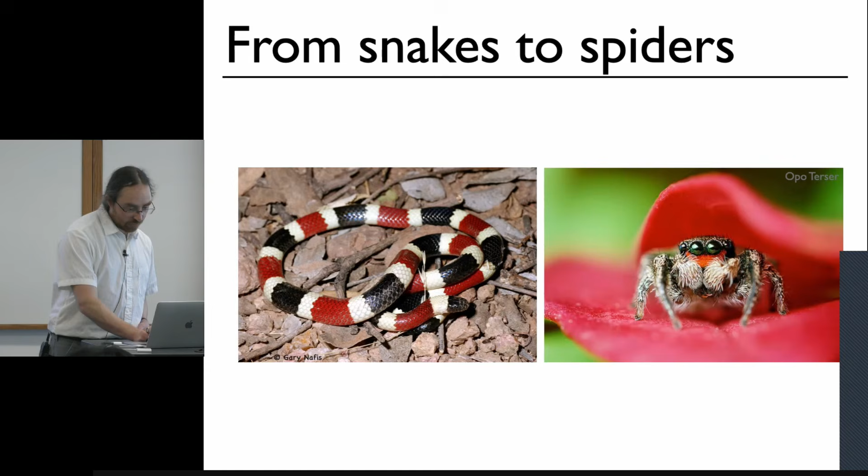I can find a way to show some other pieces there. But one thing I wanted to talk about briefly to wrap up is that we were looking at how spiders hear things on webs. As part of that, we built a large artificial spider web.

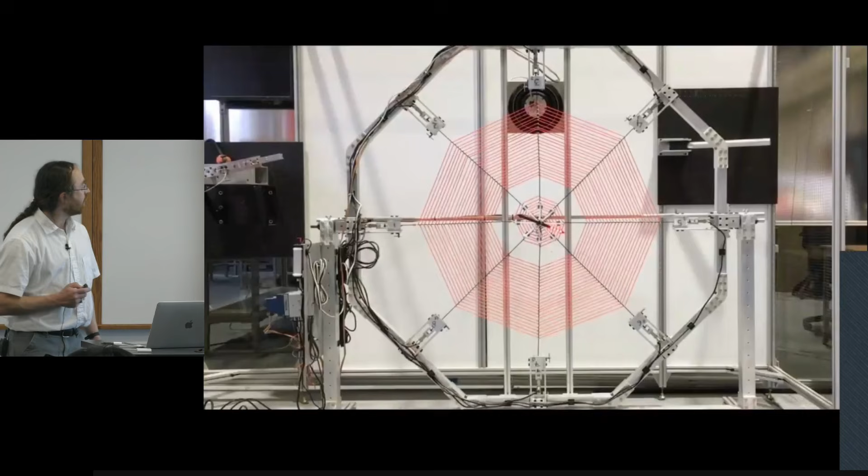And we're able to use... let's see. So we built a large artificial spider web.

And we were able to just use 8 cheap accelerometers as pickups at the center of the web, and identify better than 128 different locations on the web just from simple passive sonar, by doing comparative analysis of how the web filtered vibrations hitting different points.

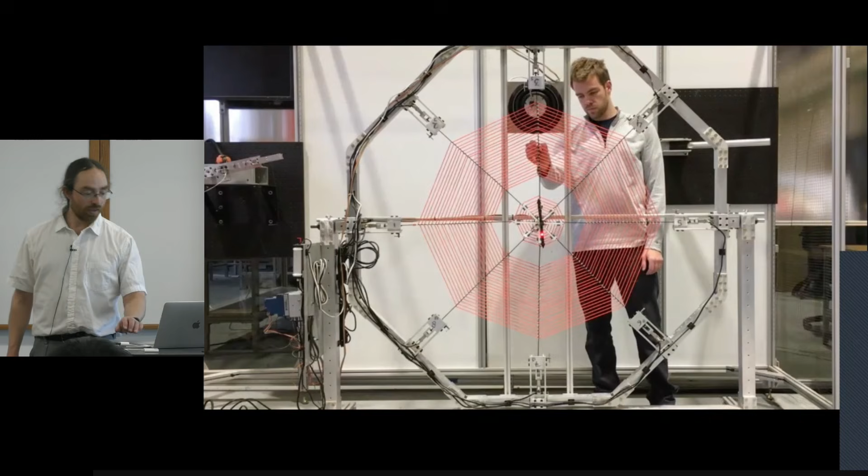And then we set that up with my colleague Chet Udell, who has an electronic music PhD, and piped each of those locations as a synthesizer keyboard key into the synthesizer he'd set up. So you're getting an analog signal from where he plucks it into the 8 pickups at the center of the spider web, then digitizing a location based off of that and sending it to the synthesizer.

And then we took that, and in 2019 we were finalists at the Guthman Musical Instrument Competition at Georgia Tech, where we got to go and perform in the big final concert there.

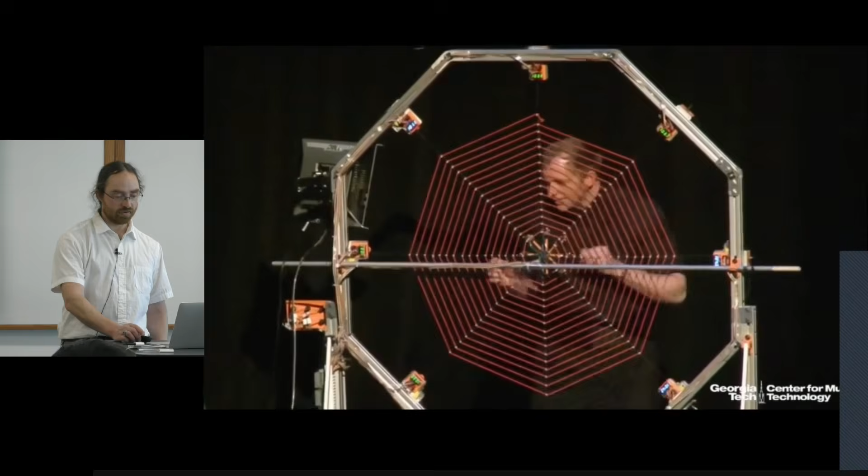I think I'll end there. Thank you.

So a few clarifications. Yeah.

I was wondering, when you're doing that formulation, are you throwing away the Coriolis term, or are you only throwing out the acceleration effect there? For the examples I showed, the Coriolis terms show up in the perimeter cost. What I didn't have time to put into the presentation is that if you're looking at an inertial system, the perimeter cost corresponds to how much energy you're giving into the system, so a better cost for inertial systems is to look at the covariant acceleration, which includes your Coriolis terms along the path.

So at any one point, if you turned off the motors, you would drift. There's some natural trajectory you'd move along. The covariant acceleration says how much are you at any one instant pulling yourself away from that natural trajectory, and that's where the Coriolis terms show up in that calculation.

One of the things that's interesting is that your cost under the covariant acceleration idea grows as the square root of your radius. So if I do a set of circles, your time to completion under inertial considerations grows as the square root, because your perimeter grows linearly but your curvature goes down, so you can move faster at the same acceleration. As you grow to a bigger circle, you can actually move faster around it at the same centripetal acceleration.

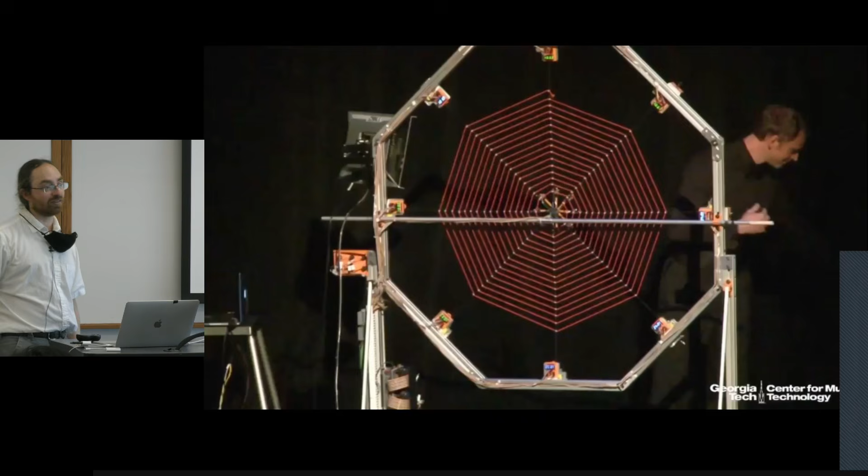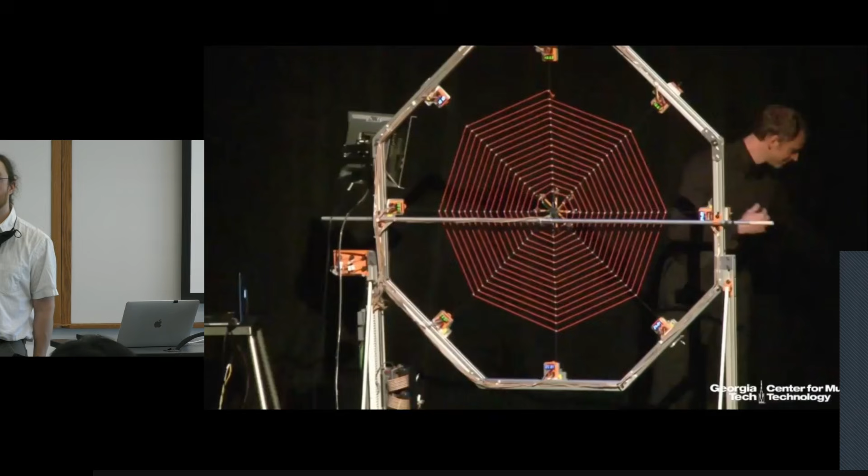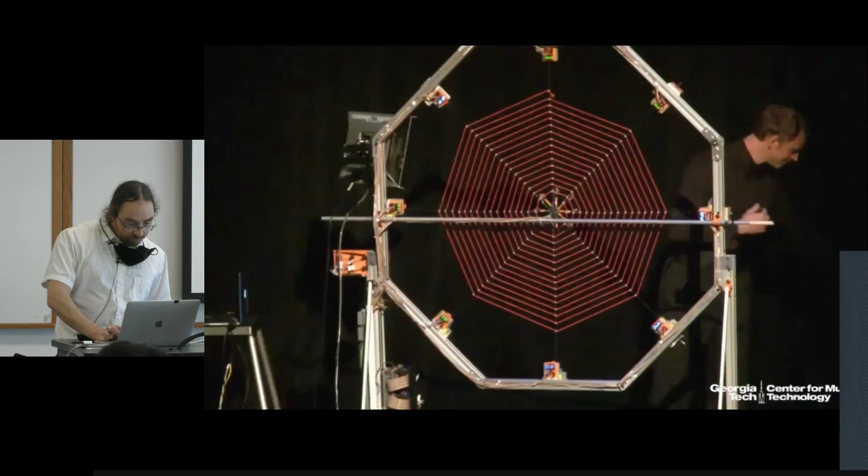Like an inverse operation. Is that mapping guaranteed to be a bijection? I feel like it's not necessarily a bijection.

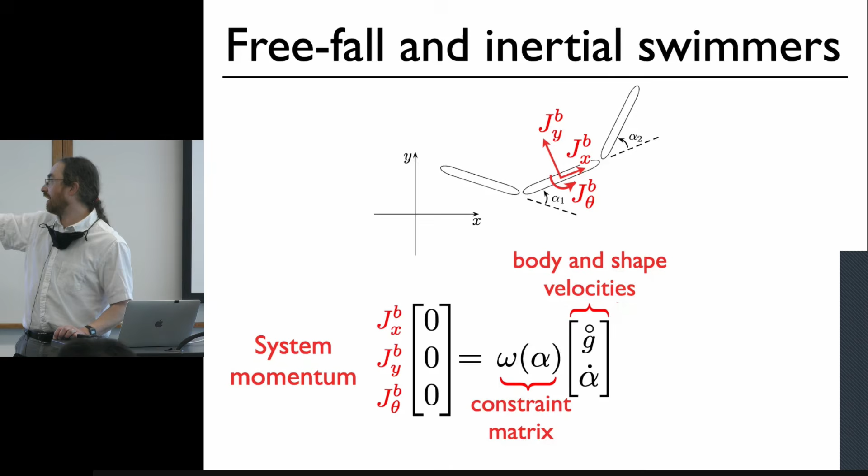Let's look at it intuitively and then pull back to the math piece. What this is saying is the left-hand side - let's go through and pull this out. When I split like that, in this case, that says for the inertial case, what is the momentum of the whole system. Omega g is what is the momentum of the whole system if I lock the shape velocity and just move the body. That ends up being just like a diagonal identity matrix, a diagonal matrix. So for the inertial system, it's guaranteed to be that.

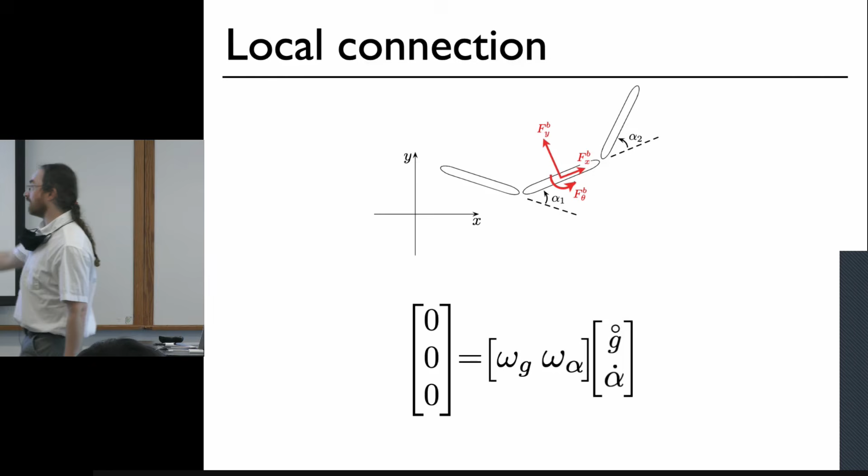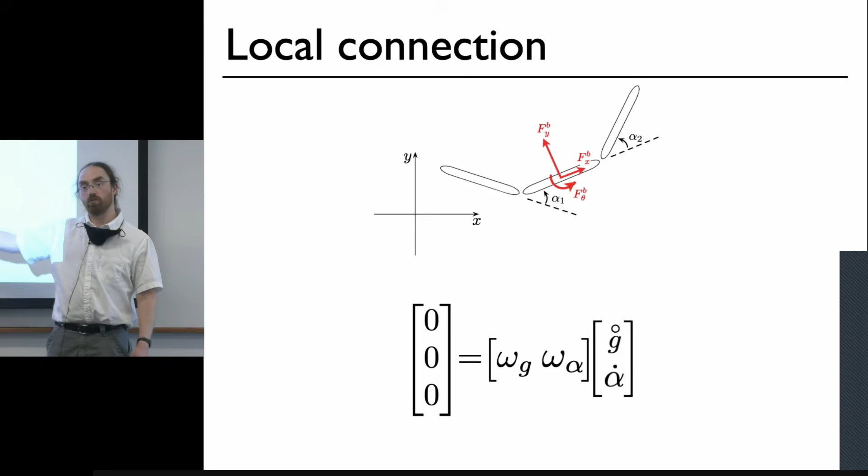When you look at the skater system, you can symbolically invert it, and then that symbolic inversion, if you actually evaluate it at one of those configurations where the constraints are collapsing on each other, you'll get an infinite value out the other end. So the way I look at it is you can generally symbolically invert it, and you may have singularities in the output, but the operation of symbolically inverting it is fine to proceed with, because ultimately what we're doing is finding the null space complement. If certain shape velocities aren't in the null space, there exists no null space complement, and you can catch that at various points. I like to catch it just at that final end where the inverse product breaks, rather than hedging about whether I can do this in general. I can do it in most cases, and we know how it will fail in the edge cases where it doesn't work.